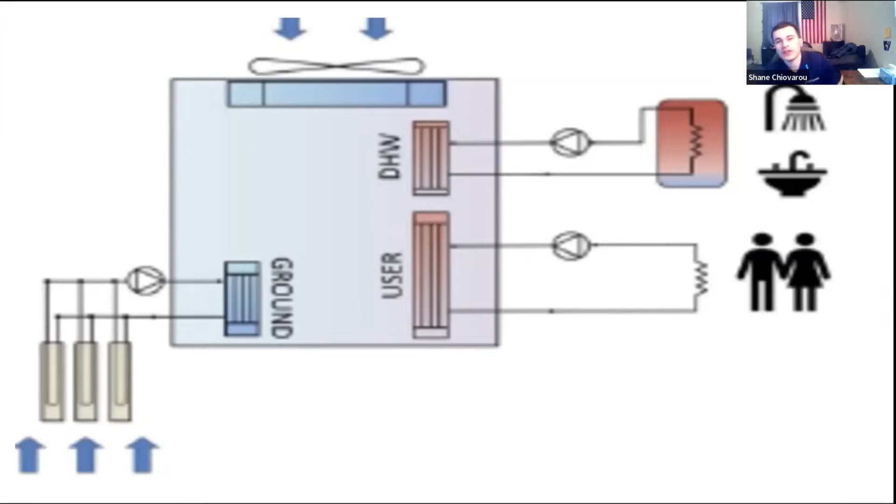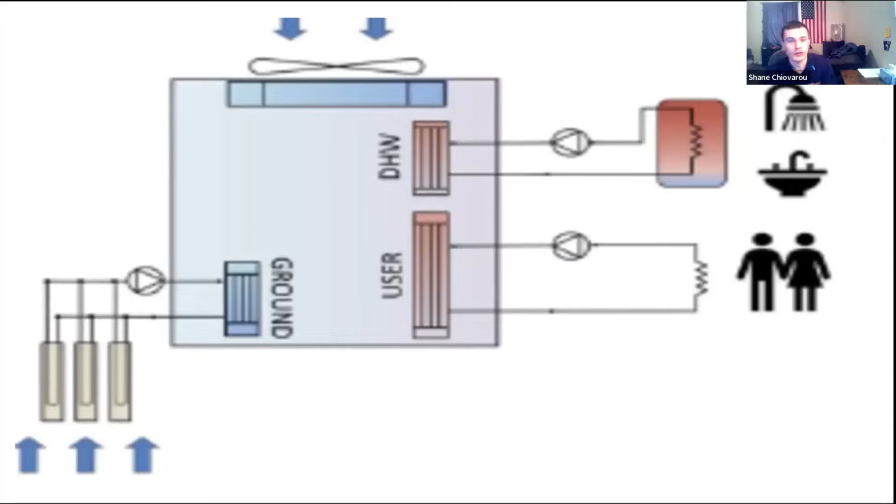Thank you, Shane. My name is Gaylord Olson, and I'm an engineer. I live in Princeton, New Jersey, and I've been working with some other engineers locally and elsewhere in the country on some different kinds of heat pumps and underground thermal storage as well. They kind of tie together.

What you have on the screen now is kind of a blurry example of what would be called a multi-source heat pump. This is kind of an extension of what people usually have outside of their home right now, which is a central air conditioner box. So instead of only being a central air conditioner for cooling, a heat pump has what's called a reversing valve internally so that it can be a heater or a cooler, whichever you need at the time.

In this case, it's a multi-source heat pump. It's got an air source element at the top, which has a fan and a coil with refrigerant in it. And that is an air to refrigerant heat exchanger. That's the basic element of anybody's outdoor condenser box for a central air conditioner.

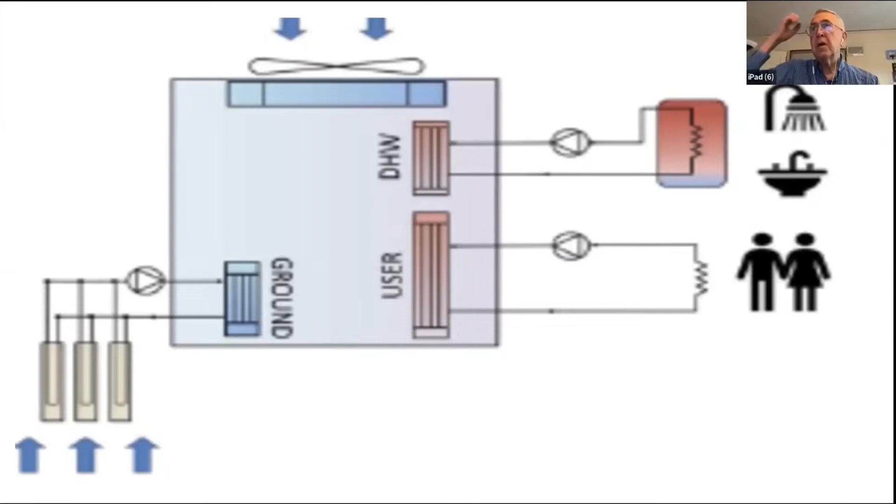In Germany right now, there's another choice. You can buy a multi-source heat pump from a company called ThermSelect. If you go to their website, in big bold print on the home page it says the most efficient heat pump in the world. It's more efficient than ground source heat pumps and much more efficient than strictly air source heat pumps. By efficiency, I mean for a given amount of dollars to install the system, the electricity use for a given building and load will be actually lower than any other heat pump. I think they have a legitimate claim for that promotion.

In this country, there may be one company offering a multi-source option, but not in a single box like this example shows. I've got to watch the time here so I don't spend half the talk on one slide.

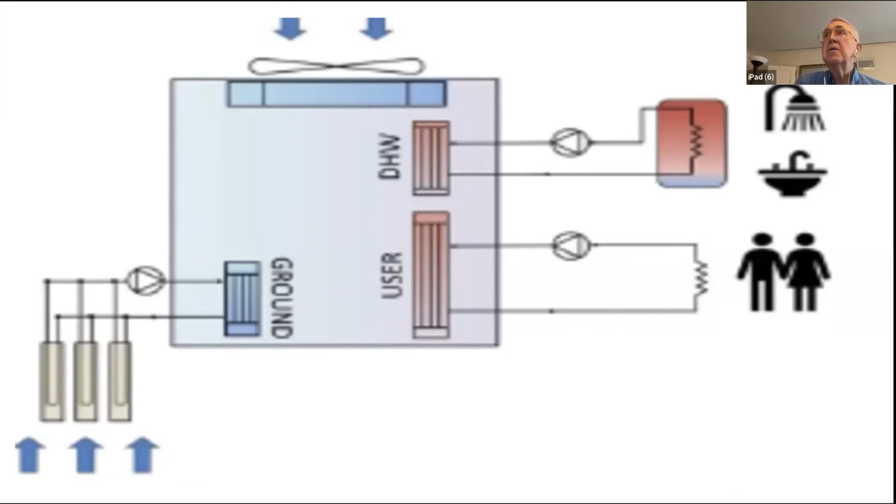So I'm going to move along now. I hope—I pressed the advance button. I guess there's a time delay. Oh, wait a minute, what? I'm not able to advance the screen. Oh, there it goes, I just had to click somewhere else. I don't know how that happened.

Anyway, here's another example of a multi-source heat pump, designed by people in Italy. In this case, there's no air source mode at all, but instead the multi-source comes from a solar thermal collector. If you attended the first talk in this session today, you'd have learned a bit about solar thermal collection—that's at the upper left here.

The solar heat feeds into a buffer water tank, and then there's a heat pump for a building. Again, you see a number of water pumps, and the other symbols with the letter Z or whatever are special types of one-way valves.

But anyway, there are borehole heat exchangers—again, drilling into the ground and putting in plastic pipe where water goes down on one side and comes back up on the other. So the heat pump in this building has a choice of water from the solar thermal collection or water from the borehole heat exchangers.

This design has another very good feature: in the summer, when it's really hot and sunshine is very strong, the building doesn't need any more heat—it's got plenty. So what do you do? You turn pump number 3 on and pump really nice warm water into the borehole heat exchanger loop, warming up the dirt all around the boreholes. This design is specifically for cold climates, so they've got nice warm dirt in December and January to give warm water for the heat pump. That makes it very efficient compared to air source or anything else.

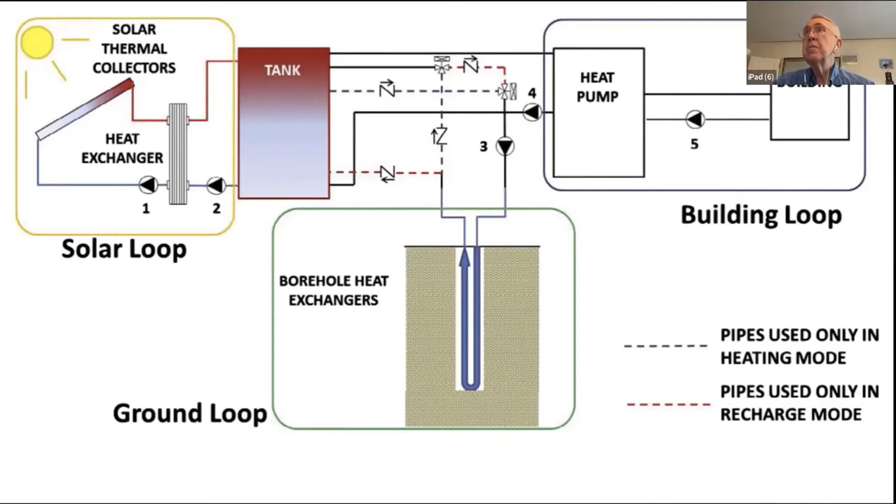This is another example of what would be called multi-source, and it comes from 3 authors in Belgium. This is much different in that even though it has something called a dry cooler - a dry cooler is nothing more than an air to liquid heat exchanger. It's got a fan, same as the radiator in your car. It's got water or antifreeze solution, and it blows air across the fins and tubing inside the device. Heat from the air will be transferred into the water or antifreeze, or cold air will transfer cooling there. So it's bidirectional. The word cooler is really a misnomer - it's an air to liquid heat exchanger, whether it's doing cooling or heating.

So here's what's going on with this example. The dry cooler doesn't have any way to feed into the heat pump in this design, but it plays a very useful role. It's used in extreme temperature conditions of summer and winter to do preconditioning of what they call the bore field - a bunch of boreholes with plastic pipe embedded in them. You'll see on the left, the dry cooler is being used only to precondition the left-hand bore field. It's shown red because that's supposed to indicate hot.

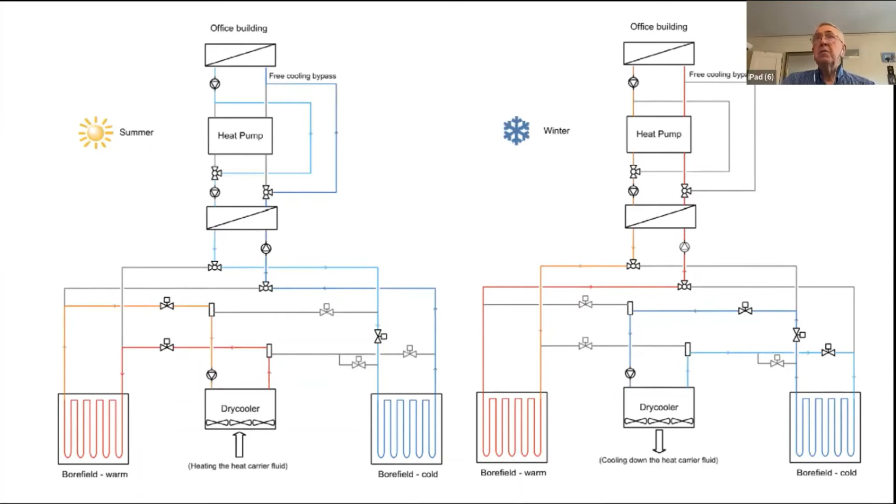All right, so we have examples now from Spain, from Italy, and from Belgium. The example from Spain is shown here in a very crude way on the left. The heat pump has a choice of fluid, either from the dry cooler or from the ground loop, whichever is better at the time. On the other hand, the system from Belgium does not have the ability to have the dry cooler output going to the heat pump. What it does have is the ability to precondition either the hot loop on the left or the cold loop on the right.

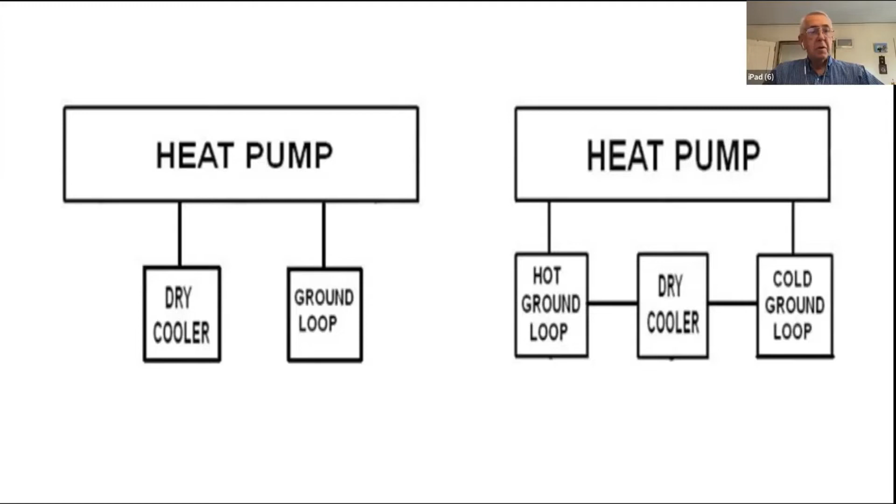Now, wouldn't it be kind of good if we could combine these effects together in one system? And I think it is possible. That's what we are going to show on the next slide - that it works.

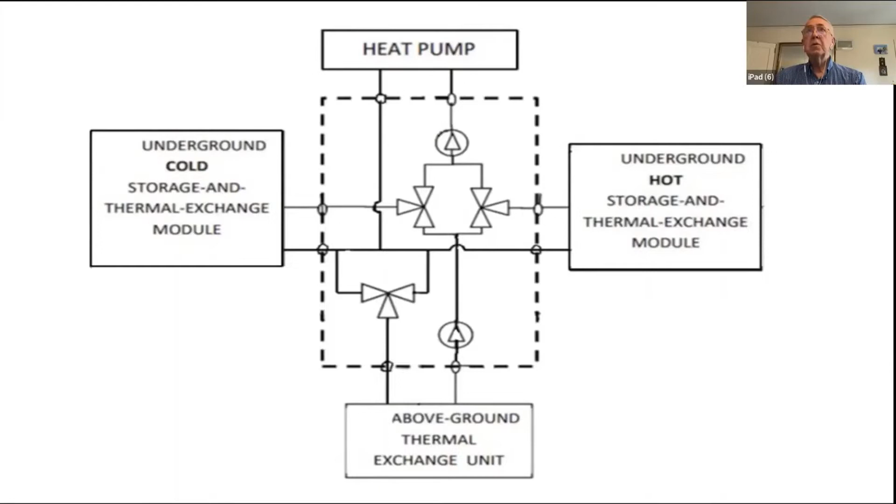Moving along, here's an example of settings of the valves to show what's going on in the coldest winter night. This follows the example of the system from Belgium. We've got very cold water from the above ground unit feeding into the left-hand ground loop, and nice warm water from the right-hand loop feeding into the heat pump, giving very efficient heating for the building.

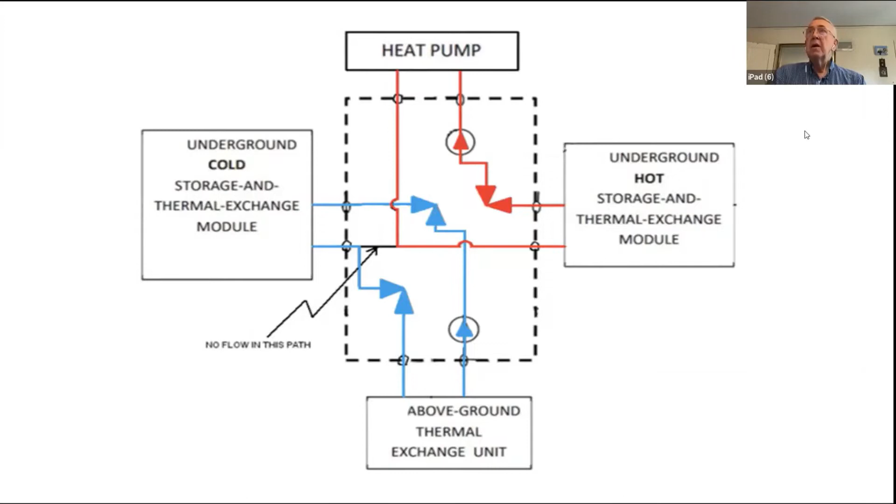On the opposite season, on the hottest summer afternoon, we're taking nice warm or maybe even hot water from the above ground unit, feeding it into the right-hand ground loop. And we're taking nice cool or cold water from the left-hand ground loop, feeding it through the heat pump to get efficient cooling for the building. So that gives the benefit of what we were showing from the authors in Belgium.

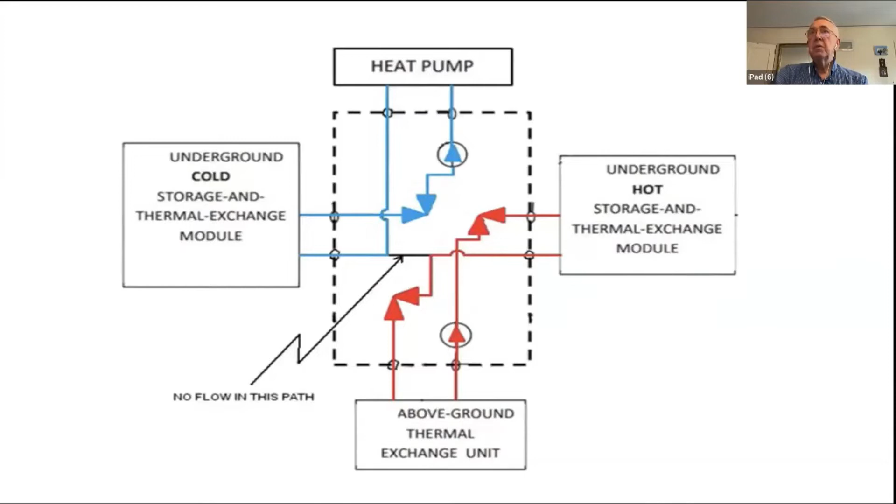Now, if we want to, we can do what's called a parallel mode. If the temperature from the above ground unit is very similar to the temperature from the one below ground, you can have part of the water coming from both. To keep it simple, you might have the same water flow from both the bottom unit and the right-hand unit. To do that, you control the top water pump to have twice the flow rate of the bottom water pump. In that case, the same amount of flow will be coming from both blocks, the right-hand one and the bottom one.

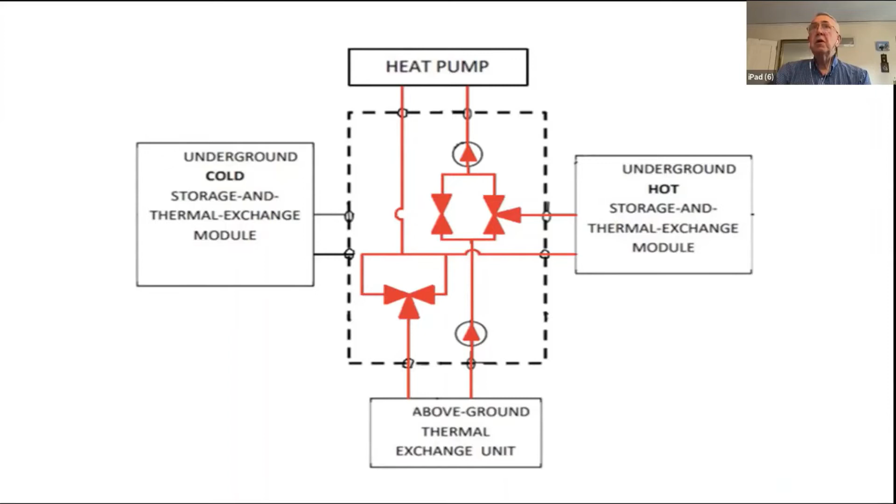And this is strictly for heating. You can do the same thing strictly for cooling. In this case, we're getting an equal flow rate from the left-hand block and from the above ground block at the bottom, if we want.

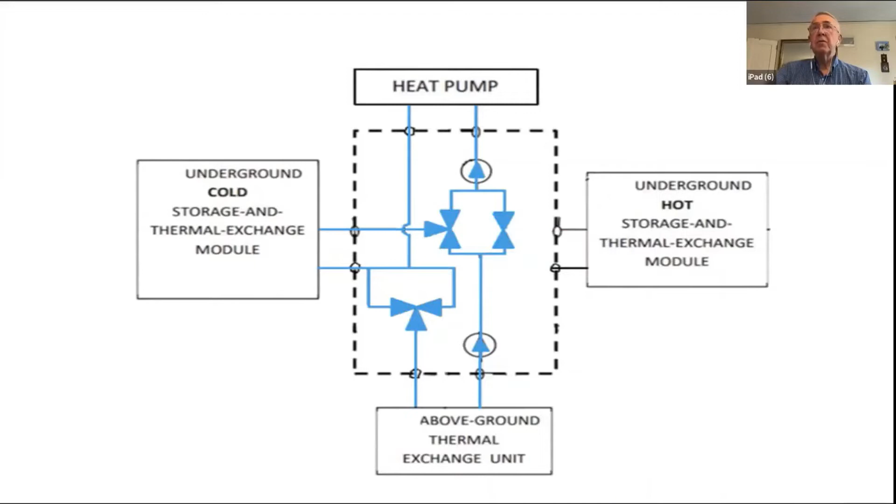Now, the benefit of that parallel mode shows up here graphically. I think I'm okay in terms of time. This graph shows three different conditions for the valves and pumps that we were describing earlier. And this shows the example where the building needs to be heated.

If you have an air source heat pump, then what you've got is the 45-degree angle line that's called real world dry cooler there. And that would follow all the way down to the bottom left, which means you're going to have really cold water for the heat pump, even though you're trying to get heat for your building.

That is extremely inefficient. Let's see, if I move my mouse around, Shane, can you see where my mouse is pointed right now? Yeah, we can see it.

Oh, okay. So anyway, if you have just an air source heat pump, then you're going to be along this line right here. So if you're trying to heat your building, I should explain: source fluid temperature is what's coming into the heat pump, and ambient air temperature is what the air temperature is outside. So basically right here is the freezing point for the ambient air, 32 degrees Fahrenheit.

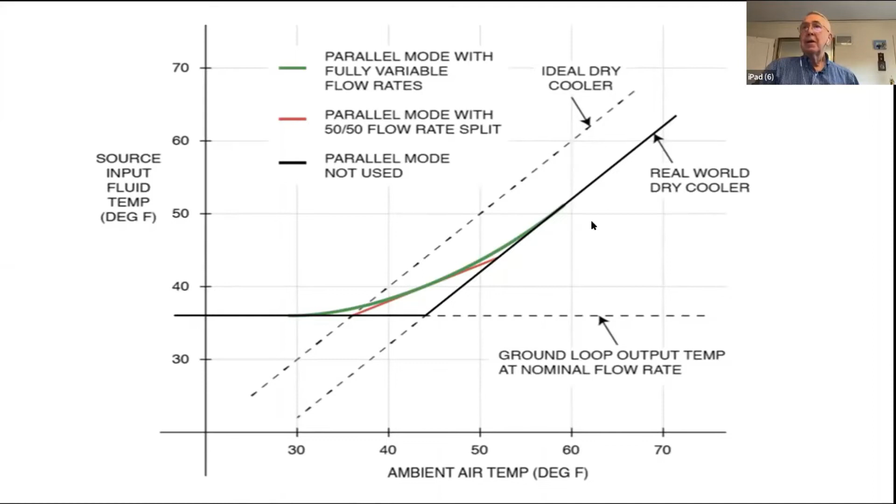So I guess I've spent enough time on this one. I think I'll move along to the next one.

So when we go to the air source mode, the connections and the flow are as shown in this graph. Neither of the ground loops are in operation, or in use, I should say.

We have the flow equal from the two water pumps. So it's counterclockwise - the arrow indicates direction of flow, actually. So we have water flow coming up this way, coming down this way, and these two valves are set so we do not allow any flow horizontally into this block or the left-hand block.

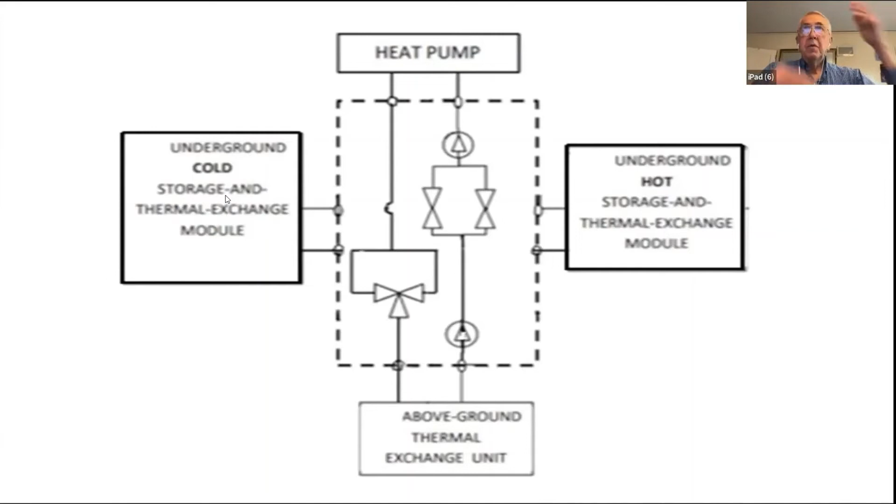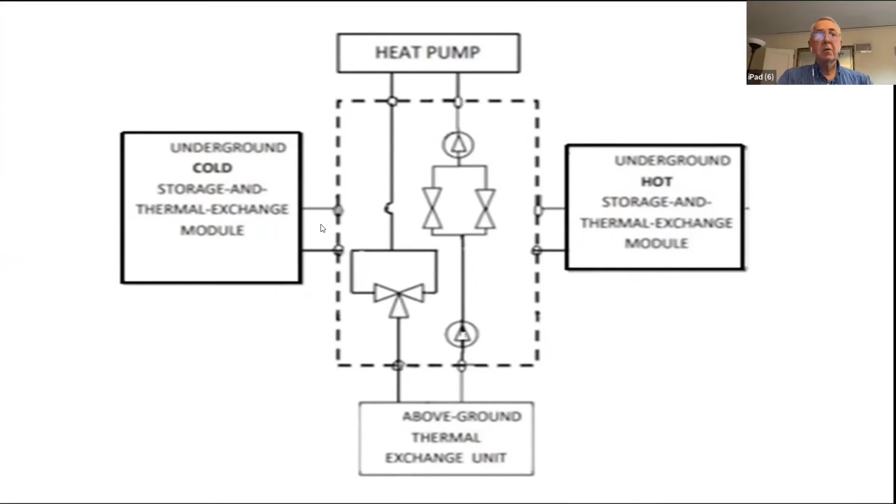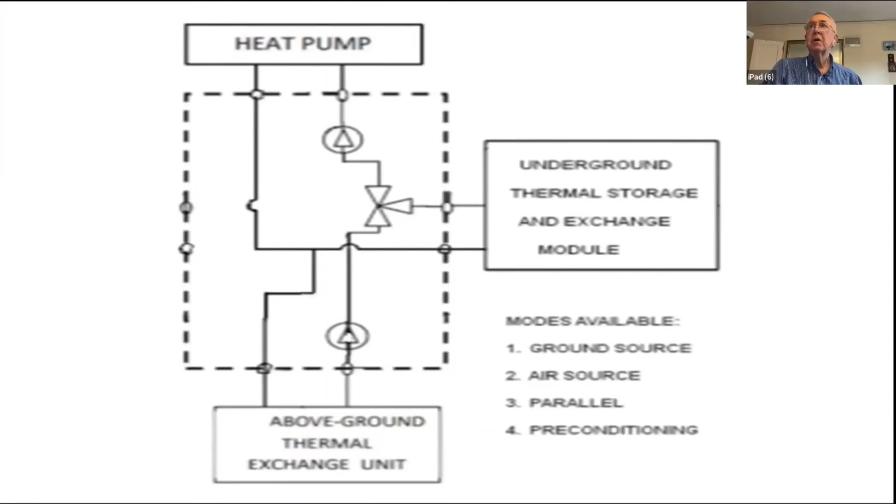So now suppose that somebody has a large building, or suppose you want to simultaneously have water fed into a number of buildings in a community or a campus - how would that work? Anyway, this is an example of that.

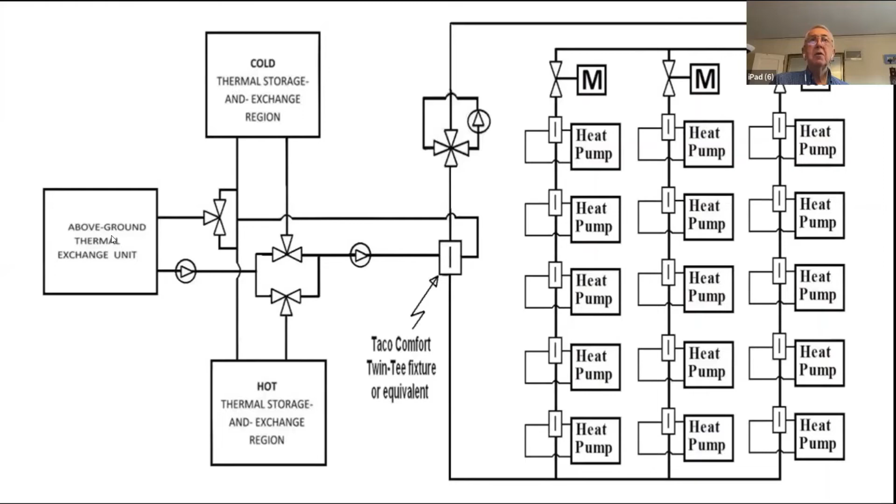So here, instead of a single heat pump, we're showing 15 heat pumps, a 3x5 array of heat pumps. And if you look at the valve arrangement on the left, you'll see it's identical to what we've been discussing. These are switched around so that the above ground unit is now on the far left rather than at the bottom, but the two valves and the two water pumps and the three valves are just identical to what we had in the previous design.

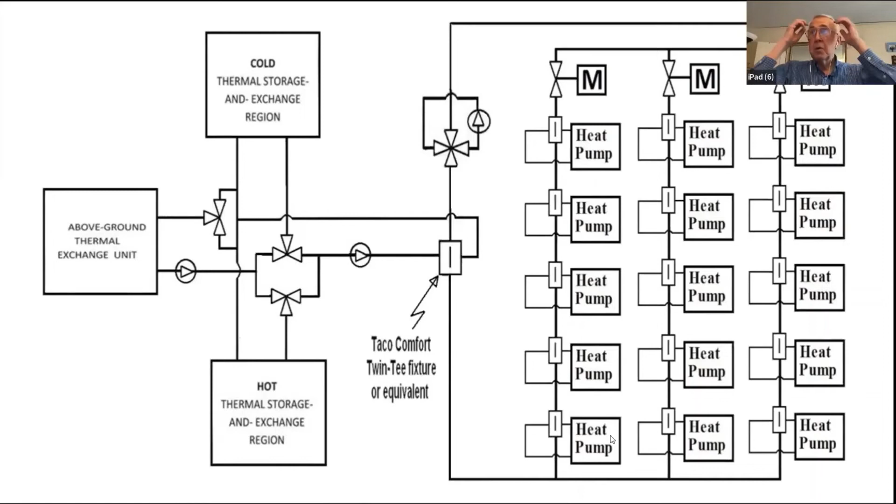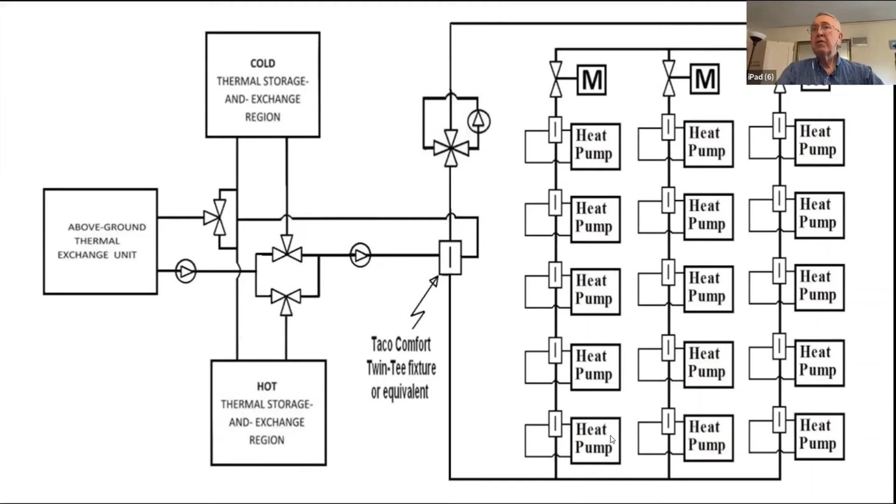This kind of reversal has been done for different kinds of thermal distribution products, but as far as I know, it hasn't been done yet for an array of heat pumps, such as shown here. There's a lot more engineering work that needs to be done to optimize everything regarding that. So anyway, moving along.

Now, suppose we want to couple more than one of these primary loops together. There is a way to do that, and that's shown on these 2 images here. Primary loop number 1 is what we were just talking about. You see the reversing valve and the water pump, and we could have flow either clockwise or counterclockwise through that loop.

Now, suppose up at the top we have another primary loop, which has the same kind of things in it. Let's say another 15, or it wouldn't have to be 15 — it can be any number of heat pumps and or chillers that are being fed from that primary loop.

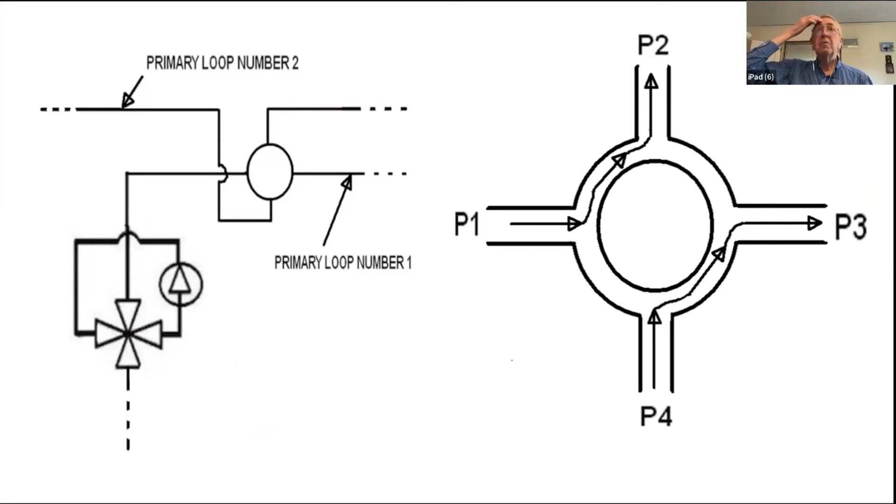So to couple them together, we're proposing that a donut type device be used for this coupling. An enlarged view is shown on the right here. It's very simple. We have 4 equally sized pipes that flow in the east-west, north-south configuration. The example with the arrows on the right here shows clockwise flow

in this bottom primary loop. The water is coming in. You see the arrows here. Water is coming in this way, flowing out this way. So we have counterclockwise flow in primary loop number 2. Water is coming this way across, down here, and then up. And you see the arrow coming up here.

So basically, the way this works is when we have an equal flow rate in those 2 primary loops, then all of the water from primary loop number 1 has to flow into primary loop number 2. It cannot flow directly across. It has to flow all the way through primary loop number 2, and then it comes back and gets back into primary loop number 1. So if you have a molecule of water that you're trying to follow through both of these loops, it's going to go through both loops before it can get back to where it started.

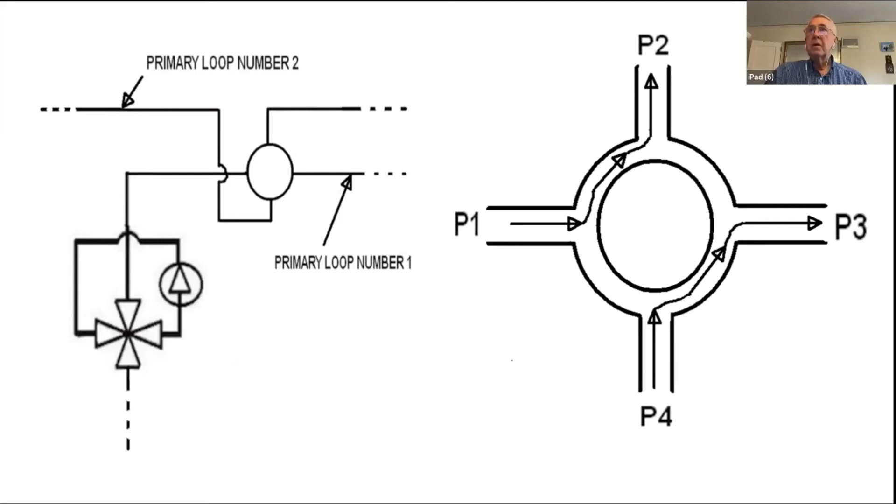And what this means is if you have a source of heat in one of these loops, let's say it's a laundromat, or it's a computing center with lots of computers generating heat all year long, that heat can be shared with every single heat pump in both of those loops, which is a very good feature. So anyway, this looks kind of interesting as a way to combine the loops.

Moving along now to something much different. Instead of boreholes in the ground, which we've been talking about, suppose we have a water pit. And it could be a natural lake as well. This is done quite a bit with ground source heat pumps. People put a heat exchanger at the bottom of a pond or a lake, and that works. You have pretty good stable temperature. But not everybody has a pond or a lake nearby that they can take advantage of that way.

But if you go to Denmark, you'll find a number of examples that are kind of like this design. And they call it pit storage. It's a water pit, actually. It's excavated, and the earth that's dug up, they just pile up around the perimeter, which has the name dam here. It's a dam on all 4 sides, actually. And then at the top, they have a floating insulated cover. And that's a very important part of this design.

And then they have a very large array of solar thermal collectors, so that all summer long they're collecting heat from the sun, putting that heat into the water pit. And the array of collectors is so large that they can get close to the boiling point of water, believe it or not. So at the end of the summer, they have temperature near the top of this water pit that's close to 200 degrees Fahrenheit. So they've got to insulate that so that heat doesn't escape. So that's the purpose of the floating insulated cover at the top. That's a very critical design part of this.

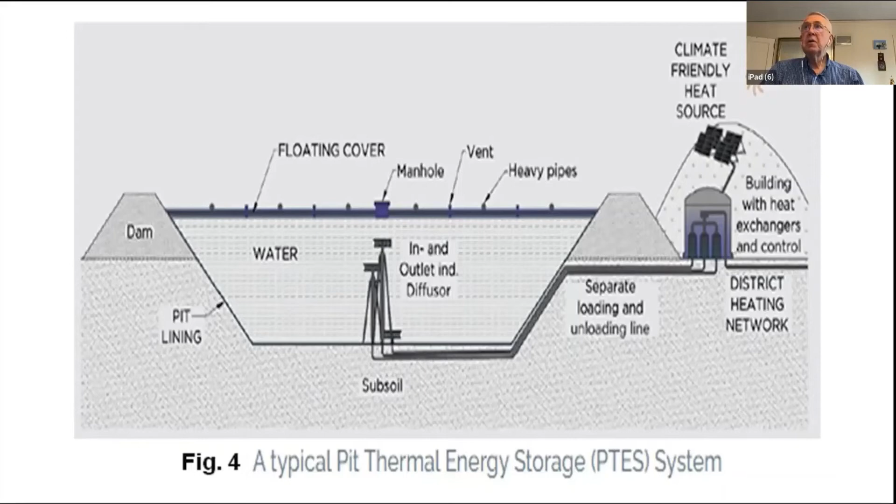Everything that I'm doing assumes that we will have heat pumps in the system to give the temperature that's needed for the building, even though we have only moderate temperatures in the water that's storing the thermal energy.

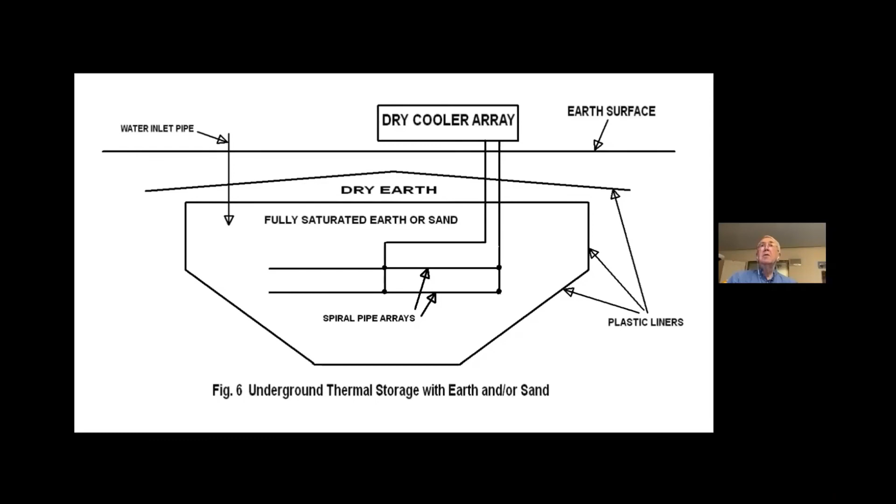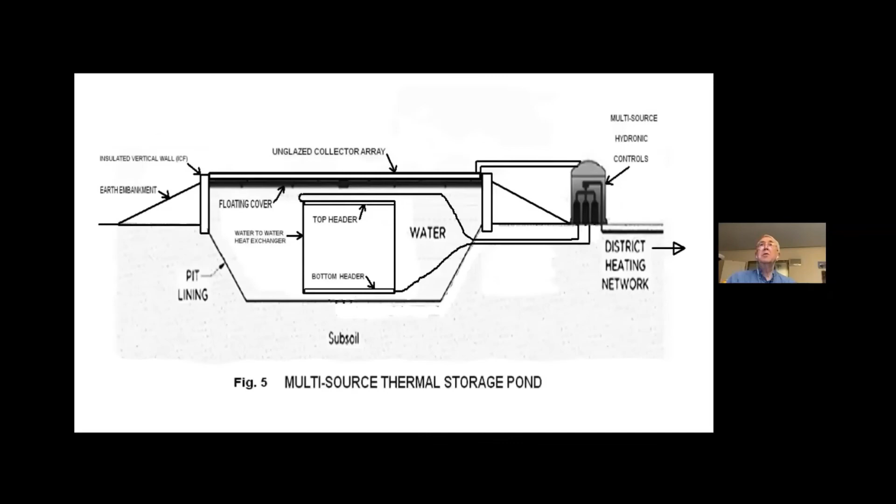Moving along, this example shows how we might try to optimize the sizes of various elements. To explain this more completely, I need to go back to a previous slide. So this right here shows an above-ground thermal exchange unit, which could be a dry cooler or a solar thermal array. We're also showing an underground thermal storage region. So the question is, how do we optimize the sizes of these two things?

If the above-ground unit is very small, it's almost the same as having only a ground exchange, like boreholes or trenches. We know what that does, and it's too expensive for most people, which is why it's very little used. Now, if the above-ground thermal exchange unit is all we have, that's going to be extremely inefficient for heating—if we have only very cold air, it's going to be very inefficient. And with a dry cooler, it's going to be very inefficient at the other extreme also.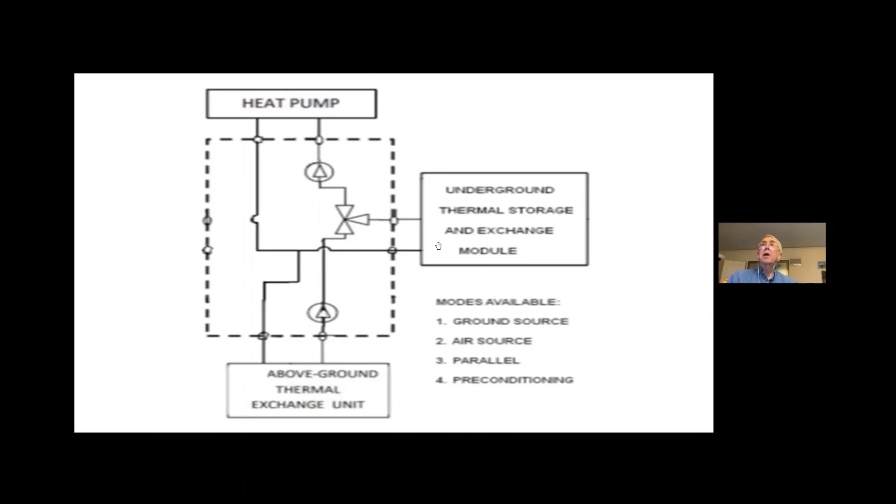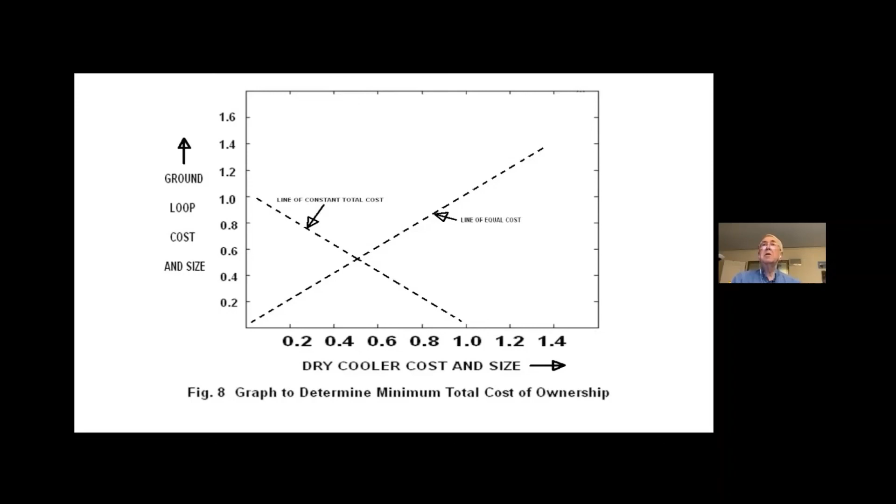It's kind of a normalized point where the total cost of ownership of a simple ground loop design is minimized. Now, in the case of a multi-source system where we also have a dry cooler to give an air source mode, we could put a scale there also. If we pay too much money for a large dry cooler, we're up here on the right-hand side of the graph, so the total cost of ownership is too high. Also, if we minimize that dry cooler size, we're down here, almost back to where we have only a ground loop. So basically this graph shows that with multiple simulations, it would be possible to get to a single point where the total cost of ownership of the multi-source system would be minimum. There's only one point where that would be found. This is not simple, but it's a way to do it eventually to make sure we're not wasting people's money, either on the initial cost of everything or the cost of electricity over a long time period.